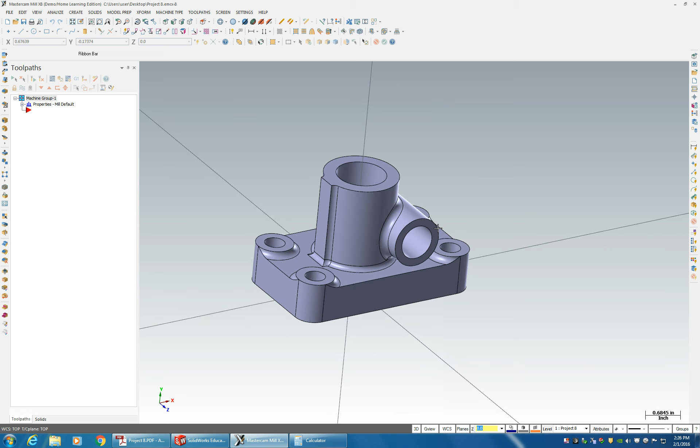I'm going to rotate this thing and move it, because right now I'm on top WCS, and when I click top I'm actually looking at what I think is the front face. So let's 3D translate this: select this guy, and we'll take what is currently the top view and make it the front view, moving only—make sure you don't have copy checked. Approve that and it rotates 90 degrees for you. Now when I click top, we're looking at the top of the part. It just helps with orientation.

Next we need to import our casting, which we'll use to drive our stock. So let's go File, File Merge Pattern, navigate to your desktop again, select SolidWorks files, and we'll do Project 8 casting.

It imported fine, but it's in the wrong location too. I'm going to clean some of this up—come to levels, we'll call level 1 CAD. Don't know if we'll actually use any CAD in this project, but I have to keep it consistent. Number 2 will say solid, and number 3 will say stock.

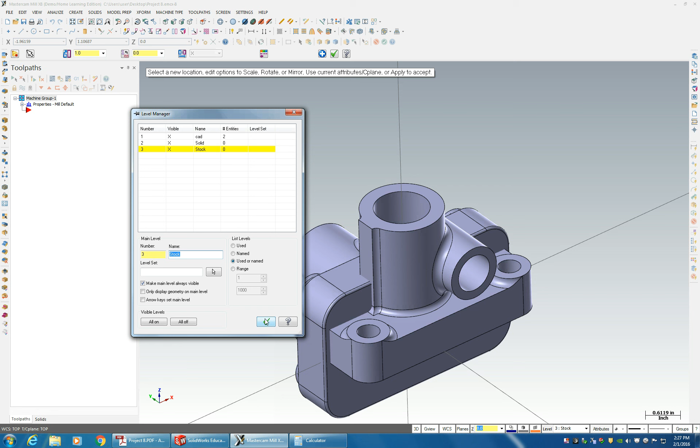We need to move our finished model to solid and the casting to stock. So clicking this guy here, right click on level, move him to level 2. I can turn the visibility of level 2 off. Now I can click this guy and move him to level 3.

Now he is also oriented wrong, so we're going to rotate him too—X form, translate 3D, this guy here. We want the top view to become the front view, and we're only moving it. Clear the colors. So now when I turn on the second one, you barely see anything.

That's fine. Next we need to set up our machine type. Let's go to mill, and we'll choose a generic Haas 3X mill. If you don't see it here, click Manage List, and it'll be in the left hand column. I already have it set up, so you click here and get this in your toolpath manager. Let's open this up, go into Files, Tool Settings, and click these first 4.

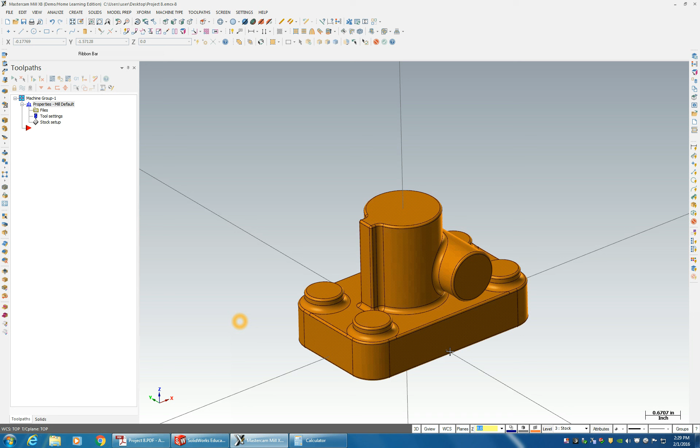For stock setup, we're going to do solid. We'll click on this arrow here, select the solid we call our casting. We want to display it, want it to show up as a solid, and we'll approve it. Now we'll come back, activate layer 3, turn on the visibility of layer 2, turn off the visibility of layer 3, and there we go—we now have our finished part nestled nicely within our casting.

You may see this area here, which is just the way the fillets were created between the two models in SolidWorks. It's nothing we really have to worry about. In reality, the castings would vary from part to part anyways.

Now that we got this all situated, let's get started. I'd say the first operation I want to start with is putting the part in the machine like this. It'd be sitting on a fixture, held somehow—we're not really worried about fixture design right now.

I'm just going to set my WCS to the center of this bore. It may not be the most appropriate one in reality, but for the purpose of education we're going to set the origin right at the center of this, at the finished height of this machine. So let's go to WCS, Plane Manager.

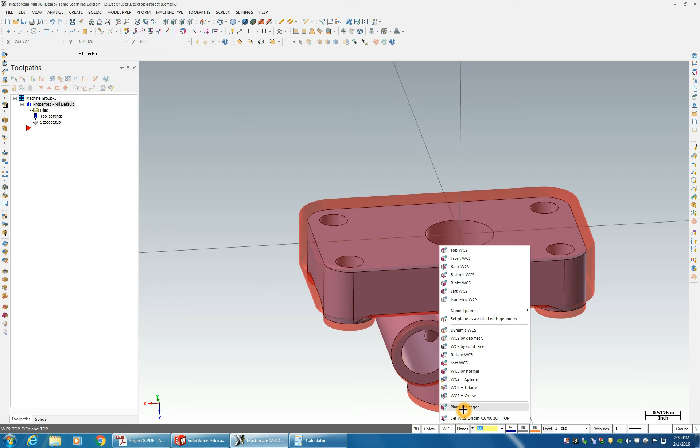We're going to click Solid Face, and we're going to click this here. And we're going to navigate through our options until we get the one we like, where the X is going to the right, Y is going to the back, and Z is going up. Now, it's not in the best spot, but that's okay, I can fix that. I'm going to call this bottom ops.

Right here, the select new origin, I'm going to click it, and I'm going to highlight the edge of the circle until it snaps to the center. And that's what I'm looking for. So there's our bottom ops.

So now what we need to do, we're still on WCS top, TC plane top. Come over to WCS, click named planes, bottom ops, planes, named planes, bottom ops. So now we got bottom ops and bottom ops. So every time we do a cutting operation, it'll use those to drive it.

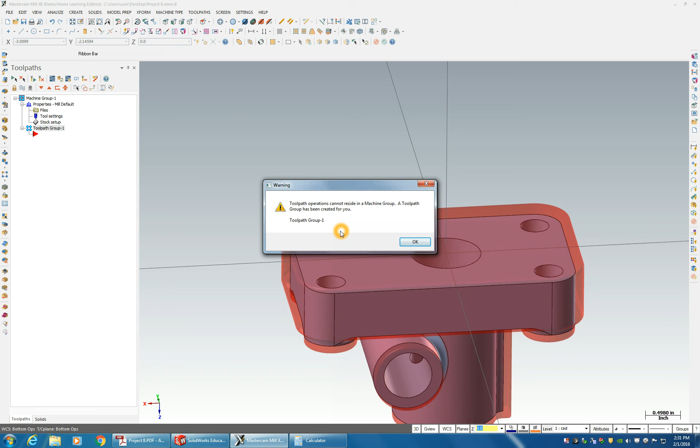So let's go ahead and start a facing operation. We're going to face this thing. And ignore that warning that came up, it was just, I must have clicked on something. So this will come up.

Now if you're using X9, you'll have a couple more options here. The only two I wanted, these two right here, loop, because we're actually going to use loop. I'll select that, make sure it's doing this loop, not that loop, and all that does is it just toggles between those two faces. So that's the face I want.

We'll approve that. Come to tool, come to tool type now, we're going to be doing a facing operation. Come to tool, and I'm going to create a new tool. I'm going to create a face mill.

Go to next. Let's use a 2.5 inch face mill. Secondary diameter is 2.75. Overall length is 2. That's fine. Cutting length is 0.25. Let's do 0.375. And it doesn't.

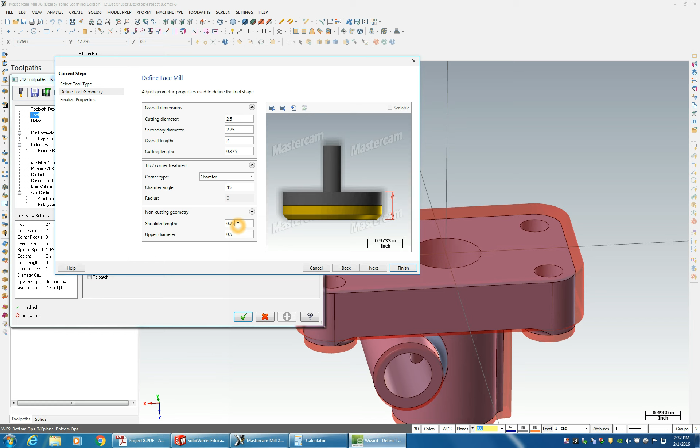This information would make more sense if you actually had your tool with you. Chamfer angle is 45 degrees, shoulder length 2, and upper diameter, that means we have to do overall length of 3, and upper diameter of, say, 1. That looks kind of more like a shell mill.

So let's go to next, and we'll look at tool number 1, feed rate. Now, in your X9 you'll have a bunch of more information than I will here. Just ask your instructor on how to use that if you need to know how to use it. But for me, we're going to do 1500 RPMs on this.

Now, we have 6 teeth in this cutter, so 1500 times 6 times 0.002 chip load leaves 18 inches a minute. Plunge rate, I kind of like to use 20, because I don't plunge a shell mill, 20 is just kind of a little faster movement. It's 6 teeth, it moves clockwise, it's carbide tipped, and I'm going to turn on the coolant.

Come over here, we'll call this 2.5 inch face mill. For face mills, I kind of leave, I'll do 45 and 5 for both rough and finish. So we'll finish that up.

Now the benefit of creating a tool here in your list is all this information is set for you. You don't have to change it every single time. If you pull from a library, oftentimes this information is going to be set to what the library has it, and it may not be what you want, and you're constantly finding yourself changing it.

So let's go over to cut parameters. Looking at zigzag, across overlap 45%. Along overlap 110 looks fine. Approach distance 50, exit distance 50. Maximum step over 45%. We zero this out because we want it to cut all the way to the surface.

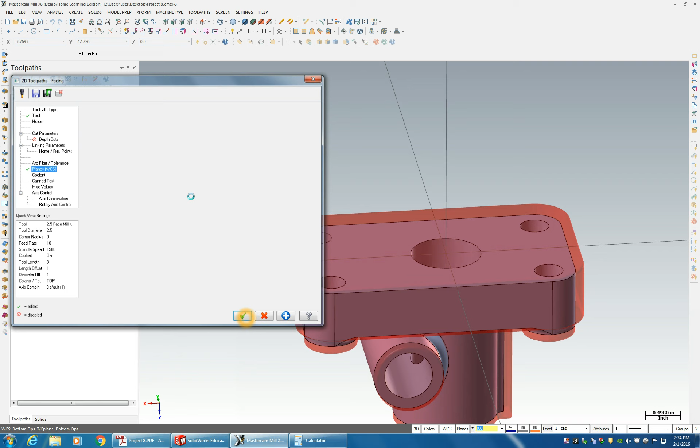So, okay, let's go into our planes, make sure this says bottom ops, this will say top top and grayed out, that is correct, with a work offset of 0. So we'll approve that. As you see, we have a nice cross entry and an exit of 110%. So we can quickly go take a look, see what we see if we like what we've done.

And there we go. We have a nice flat bottom, which is what we needed for our drawing. So we'll close that out and come back to our part.

Okay, so we're back in here, and now we're going to profile this guy. So let's go to mill tool path. We are going to do a contour. We'll leave this loop count, and we're going to select this loop, and that's the correct loop we're looking for.

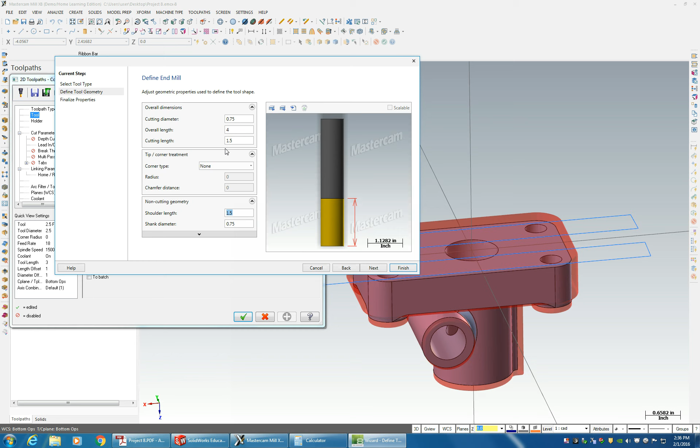End mill, we'll do a 0.75. Overall length of 4 is fine. Cutting length, we'll need a little bit more, let's go 1.5 on the cutting length. There's no corner type, shoulder at 1.5. Shank diameter of 0.75, that looks good.

So let's go to next, leave the tool number 2. Now feed rate, I said 80 is our surface feet per minute, I believe I had mentioned that. If not, we are machining cast iron, and we're going to use 80 for if it were with high-speed steel, but this is carbide, so we're going to multiply it by 3.

So we have an SFM of 240 times 4 divided by the diameter of the cutter. We have an RPM of 1280. Let's multiply that by the number of teeth, which we have 4, times 0.004, we'll use 4 thousandths for a 3/4 inch cutter. Feed rate of 20.48.

Now in reality, what you'd be doing is you'd be contacting your tool manufacturer, looking up their catalog. Oftentimes these cutters can actually achieve a lot higher surface rate. I've seen carbide and steel doing 800, 850 SFM. But for purposes of this, we're just going to go ahead and stick to the 2 to 3 times rule of HSS, more likely the 3 times.

So let's go ahead and look at the plunge rate. Once again, we're not actually going to be plunging this cutter, so let's take it at 25. Retract rate of 50. 1280 is RPM clockwise, and we have 4 tooth. It's carbide, and we're going to say this one does not like coolant, so we're going to leave it off.

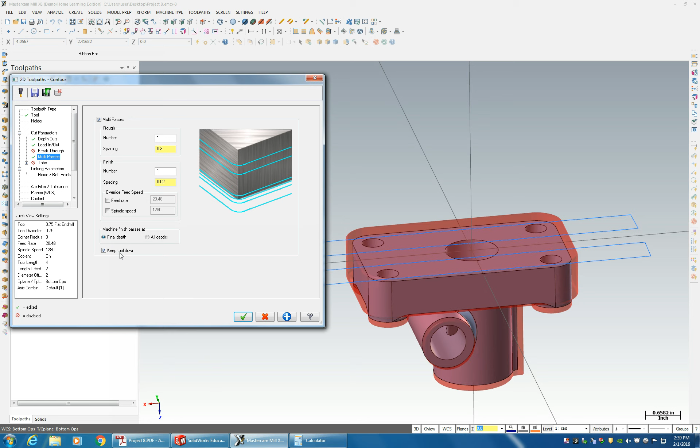And we'll go ahead and use the default feed rates. We'll machine at final depth, and we'll also keep the tool down. So for linking parameters, the only thing we should have to change here is the top of stock is still okay. Actually, top of stock is now 0 because we faced it. We'll leave the feed planes there.

And depth, we're going to actually click on it right there. That was the top of this pad. And we'll give it a little bit more depth of cut. Let's go 1 point, we'll go all the way down to 1 inch.

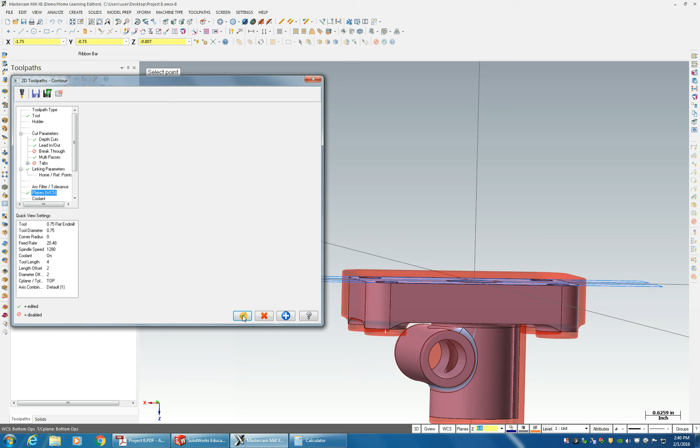Planes, we'll leave this at bottom of ops, top and top, and we'll approve it. As you can see, it kind of went around and does this nice finish pass for us. So let's take a look at what we got so far.

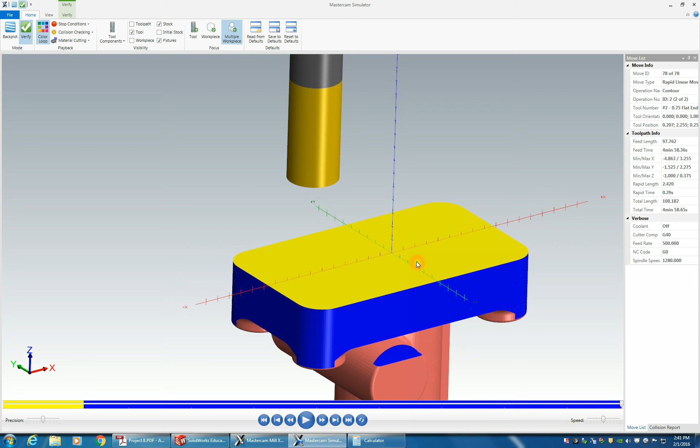I always like to have my colors turned on so I know what's doing what. So it comes across and profiles our part. Now you notice it's also hitting here. That's okay, I'm not too worried about that because that isn't going to end up being machined to the exact same width, but we'll do that one from the top. Looking pretty good so far. If you're worried about this one, we can always reduce it, but I'm not worried about it for this one. So next, let's go through and center drill our holes.

So, mill toolpath, drill. We'll pick the center of all 5 of these points. And the order you pick them is the order they drill. See, I got that in the wrong spot. So, edit. Okay, well, let's see, I'm going to reselect those.

Mill toolpath, drill, and reselect these center points. I didn't wait for the arc center to take that one, so we're good now. Now tool here, I'm not going to create a new one, I'll just select from library tool. Let's change our filters so that we only have our center drill. I'll take a number 3 center drill.

Speed, feed per tooth, plunge, that all sounds pretty good for me. I'm not going to worry too much about it. You actually probably want this thing spinning faster, and you want to make sure coolant is on when you get to it.

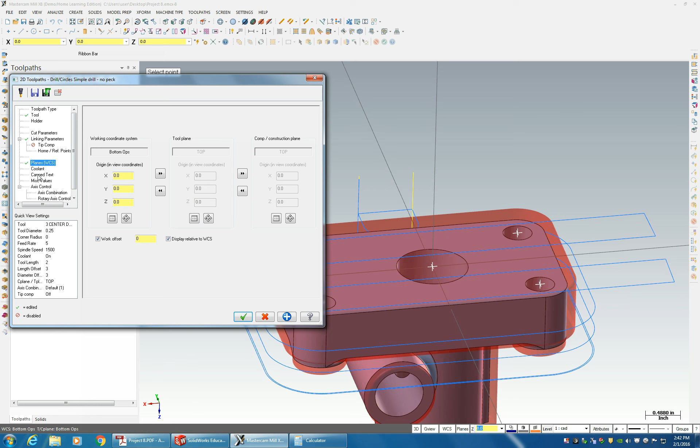So cut parameters, we're going to just do a drill counterbore. Linking parameters, negative 0.05. Top of stock is at 0, and retract is 0.1. We don't need a tip comp. Planes WCS is fine, and coolant is on. So it'll come through and spot drill these for us now.

Next is these holes. Looking at our print, the diameter of the hole is 0.41. Now I quickly went to the internet and pulled up a drill chart here. This may be real hard to read because it's grainy on my end, it's going to be even more grainy. The 0.413 I'm showing as a letter Z. It's 0.413, it's 3 thousandths bigger. A lot of these drills are a couple thousandths undersized anyways, so we're going to go ahead and run a Z drill on these particular holes.

So let's come up, mill toolpath, we'll drill. Actually, we don't even need to do that. What we're going to do is take this toolpath here, copy it, and then paste it. Now, be careful when you copy paste because it'll copy everything that has a green check mark on it. I only had that one check marked when I hit copy, so it only produced one instance of it. We're going to come back into parameters, and I'm going to change my tool.

So we're going to select from library tool, and filter out for drill bits this time. That's this icon, not the center drill. Your filter icons may be a little different in Mastercam X9 or later. So I'm going to zoom through here till I find a letter drill. Letter F, letter Y, letter Z right here.

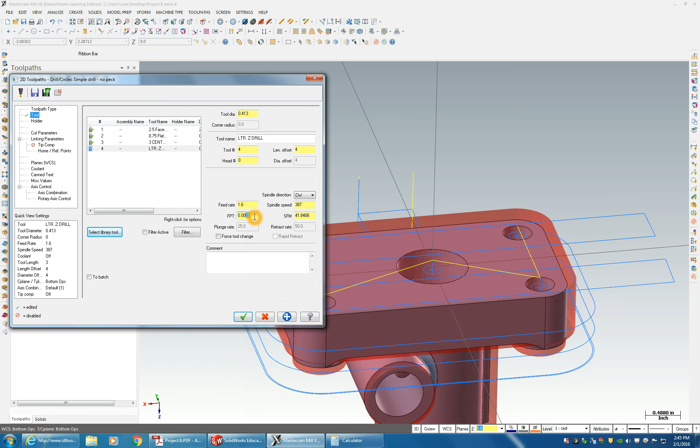So we'll go ahead and approve that. Well, we got a couple other things we got to do. Cut parameter, we're going to do a chip break. We're not going to pull the tool back out, we're just going to break the chip as we're going down. The peck is, we'll use 0.413 divided by 2. I like to use half the drill.

Linking parameters, top of stock is 0, retract is 100 thousandths. Depth, we are actually going to the bottom of these holes. We're going to do a tip comp, so we want to bust through those holes. We want to come out 125 thousandths because remember this casting's still got the pad on it. So we're going to come out, break through 125 and add this tip on. Planes, bottom of ops, coolant is on, and we're going to approve that.

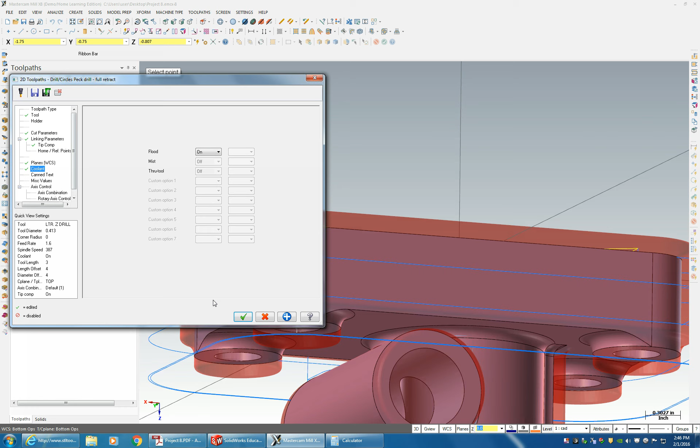But we got to make some changes here. Regenerate toolpath because I don't want to drill the center hole. So let's come into geometry and find the point. We want point, I believe this is point 3. Yeah, see the little cursor shows up here? I'm going to just delete it. So delete that point. Oh, that didn't work, so I'm going to try it again. It's under geometry, just highlight point 3 and delete. There. Regenerate. And you see it only does those 4.

Let's look at our simulation again and see what we get.

Okay, so only spot drills left here. Next we're going to go ahead and drill this one out.

Actually, let's go back and add this in here because we're going to use a clearance hole for it to mill, leaving about 20 to 10 thousandths on the wall, and then we'll bore it. Let's make that correction and add that point back in. Click on geometry, click add points, and add that one.

Regenerate. The order's a little weird, so let's come back and click sort options. Okay, so that's that sort option. Don't really care for that one, so let's sort again. Same style, but let's go this direction here. That's a little bit more efficient. Looks better.

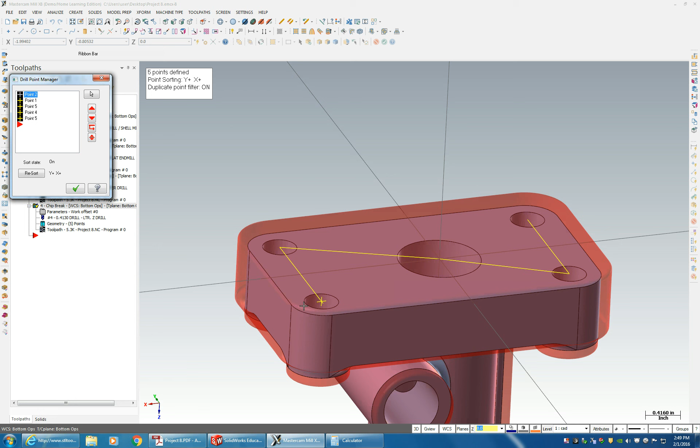In fact, we'll come back to this geometry and resort this one too. Okay, that looks better. So now we'll have our hole.

Ooh, you know what, we can't do that because we need that hole to come all the way through for that mill. Shoot, okay, let's go back and delete it back out.

So we'll highlight Point 5 and hit delete on your keyboard. That's all you need to do.

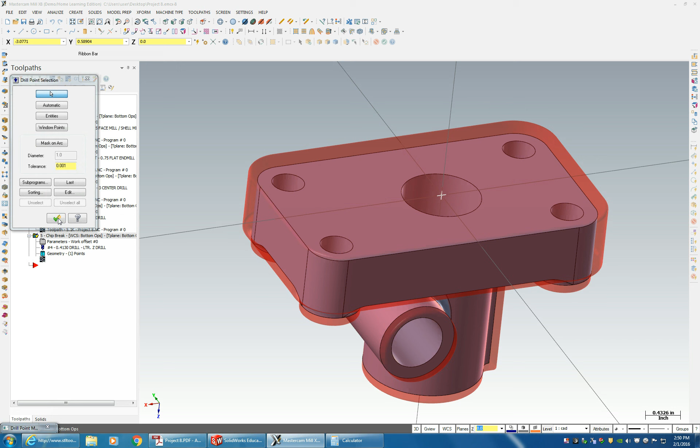Now we'll take this one again, we'll copy it. Where's copy? Oh, I'm losing my mind. There it is, copy. Paste, same thing, except we're going to go through and change our geometry. We're going to reselect all, this time just selecting the center one. Approve that, go to parameters, and we just got to change our linking parameters to the depth all the way down here. We'll approve that.

Regenerate toolpath, now let's see what we got. That hole should go all the way through. Now I don't know if you noticed that, but that drill bit bottomed out. So in reality, you have to be real careful that you don't smack your tool holder right into your part. Your bit needs to be long enough to actually get all the way through it.

Okay, well we're looking good now. Let's go ahead and think, in reality, would we be able to bore that all the way out, or be able to drill or pocket that all the way out? Probably not. So we're going to go ahead and pocket this, just from the bottom operations, get halfway through it, and then when we flip it over to the other side, go halfway through again, and then bore it from the other side.

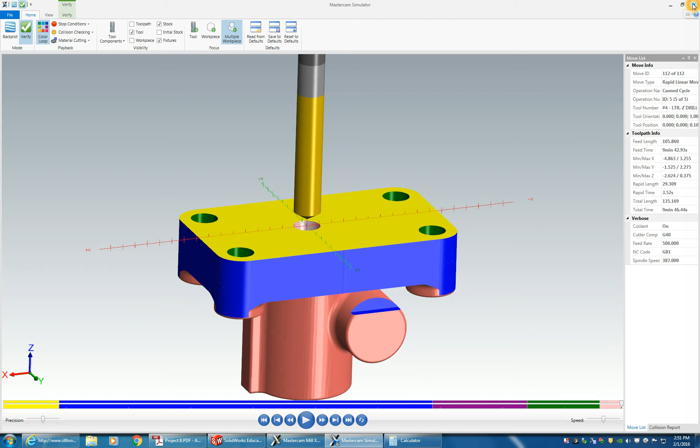Okay, so let's pull up a mill toolpath, we're going to pocket. While we're in solid select, I'm going to chain that edge. It's hard to tell which surface we have, we won't know until we develop our tool.

In our tools, we don't have the right tool, so we can use that 3/4 inch. Let me see what our size is here.

Okay, so looking at this now, maybe that hole in the middle wasn't the right size. We probably should have bumped up to a 3/4. Let's go fix that real quick, because this hole here is an inch. We're going to use a 3/4 to basically clear it out. So let's close this down.

Come back up to here. We're going to open up a new tool, or just select from the library. Looking for the 3/4 inch. There it is, 3/4 inch drill. Got to check our feeds and speeds.

So 4 times 80 divided by 0.75, divided by 2. Sorry, okay let's try that again. 4 times 80 divided by 0.75 divided by 2. 213 RPMs. And we're going to do probably 7 thousandths chip load per revolution. So 0.007, feed rate still 1.5. So 1.5 here, 213 RPMs.

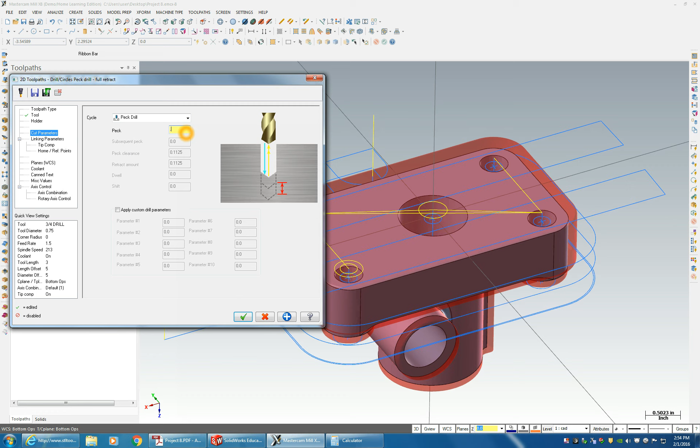Looks okay. Cut parameters, everything should be fine, except we want to change our depth to 0.375. We could probably do more than that with this, probably 0.75, we can go the full diameter before we pocket. Coolant, we still want our coolant on. We'll approve that and regenerate.

So now when we go looking at this, we have an appropriate clearance hole for a 3/4 inch end mill that we'll use to pocket this thing out. It probably would have been best if we did these holes first for sake of order, because we were putting the 3/4 inch away and then pulling it back out to use it again. So we may reorder these tool groups when we're done with this bottom operation, just to make things more efficient. Let's go ahead and pocket out this hole, leaving 10 thousandths on the wall.

So now we'll come up mill toolpath, pocket, and select that. It's hard to tell which face is right.

So tool is this 3/4 inch end mill, leaving all our information here. We're good on that. Cut parameters are standard. We want 0 on the floor, and let's do 10 thou on the wall.

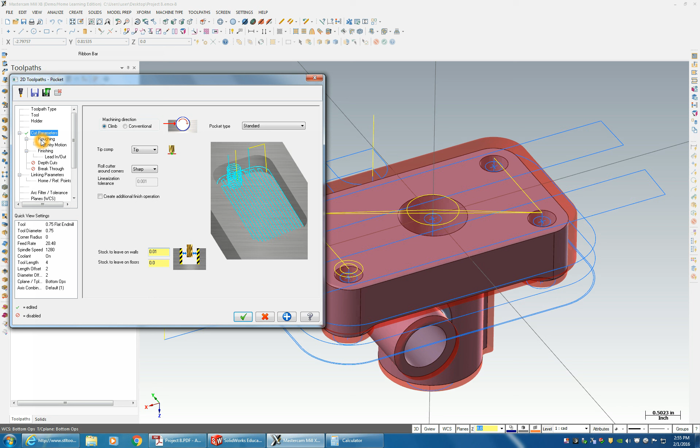Our roughing entry will have off on the entry motion, because we're going to use that clearance hole we just created. Roughing will do true spiral. We're not going to do any finishing, so I'm going to turn that off. We are going to do depth of cuts at 0.375. We're not going to worry about breakthrough, because we're not going to get all the way through this guy.

So linking parameters, we're going to do depth of here. We're going to divide that by 2, because we're only going to go halfway. And I'm going to increase it just a little bit so we have a little bit of overlap. So 1.2. Top of stock is actually at 0. Feed plane there is good.

Planes, bottom operation, coolant off, because this cutter likes to cut dry. But you know what? It would help to actually, we're going to turn coolant on in this case, because we need to try to get the chips out of this pocket while it's making. You don't want to double cut chips. So if we had maybe blast air, it'd be more efficient.

Depends on the cutter. So as you see, it's gone down and it's created our holes. Once again, let's review. See what we get.

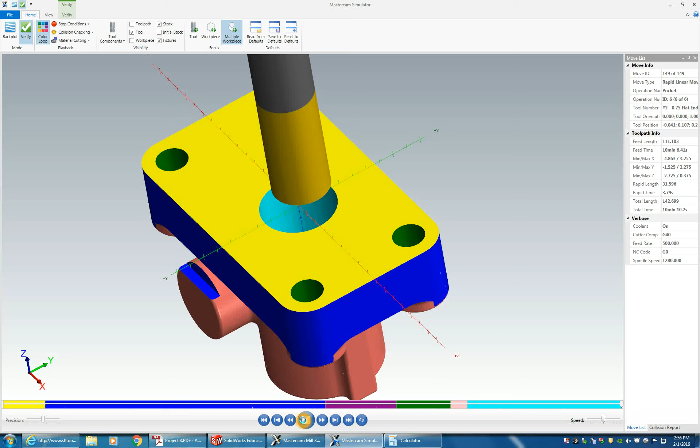Shell, profile, center drill, drill again, and pocket that out. Now I'm going to go through and we're going to reorder these guys to where it makes more sense, because I use this 3/4 inch cutter to cut this profile, and then I pull it back out to do this bore. So we did an unnecessary tool change.

So looking at this, facing is a very good one to do. We're going to take the peck drill, this one with the center drill, and we're going to take it, close it down, and we're going to drop it right there. So now it's second operation.

Next will be the drill with, let's see, we'll do this, we can do the Z drill next, which is fine, followed by the 3/4 inch, and then a contour and pocket. That is probably much more efficient.

So this is all the bottom operations. And to verify that we do have our operation in order, we can go ahead and resimulate. So center drill, profile, profile, profile, profile, and then pocket out without a tool change. There we go. We now basically have the bottom done.

So let's go ahead and hide all these tool paths. We don't need them. Next operation is we're going to work on the top.

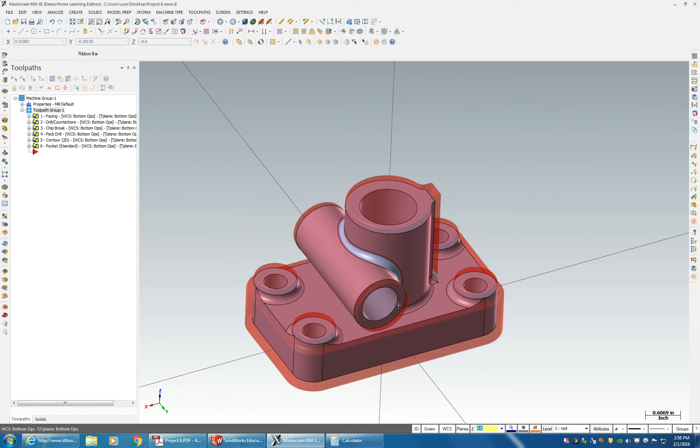And what we got to do on the top is we got to surface this guy, these pads here, finish trimming these to their, we're actually going to leave these alone. We're going to do them on their edge. Well, do we want to do that? No, we'll go ahead and profile them off. No big deal. That way we don't have to do two sides.

If I machined it up on its edge and I profiled or machined this one and then drilled through here, I would still have to flip it over to the other side to get this pad off. But if I go ahead and do it from the top, we can profile this off in one pass and I only have to do one side operation versus two. So save some time.

Okay, so let's go ahead, bust out our 3/4 inch end mill. We'll leave it in. We're going to create a new tool path group.

Do you really need to do it? Nah, not really.

There, that puts it down. I'm trying to reorder these guys here.

Okay, so we'll call this toolpath group bottom op. We'll call this toolpath group top op.

And bring our red icon below it. So we got to create a new WCS. I'm going to once again use the center of this bore for that purpose. Plane manager, solid face, select this guy. I'm going to have it kind of sitting in my machine like this, so we'll go through our options until I get this. Looks pretty good. Give it a unique work offset. Call it top op.

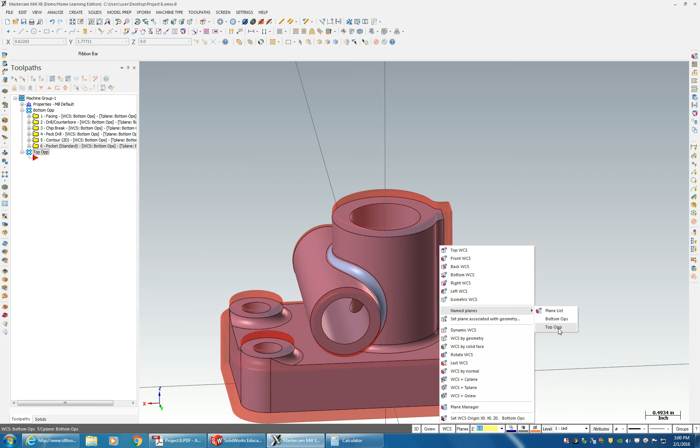I'm going to select the center of that circle and I'll prove that. Now in WCS's, name planes top op, planes, name planes, top op. And there you see our new orientation right there.

So let's go ahead, and with our 3/4 inch end mill still installed, we're going to do a face, multiple faces at one time. So let's select, other face, that face, that face. I'm going to see if this works. I haven't done this before, but I think it will. That face, that face, and it may not. I may see this as island pocketing. And that face.

Okay, tool, 3/4 inch flat. All of our variables are still set since we created that tool. Cut parameter, zigzag is fine. Leaving all the parameters we have. Depth of cuts 0. Linking parameters, leave this as incremental. So leave that at 0. Top of stock is 125 thousandths now, above 0. So feed plane, these are all good. Top op, top, that's good. Coolant off. Let's see if it works.

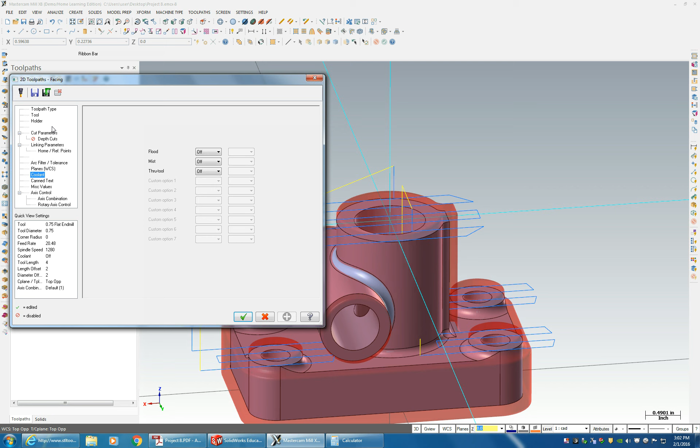Cross your fingers. Hey, look at that. Now it does cause us a little bit of problem. The orientation is bad. So let's go ahead and open up our parameters. Cut parameters, rotate things 90 degrees. Improve that, and let's see if we get a better result.

Now the question becomes, do I miss the wall here and here? My gut says I don't. Let's take a look. Bam. See, I hit that. Okay.

So let's go to geometry here, open up these solid chains, and delete that loop, that loop, that loop, and that loop, leaving only the top loop. Regenerate. That looks good.

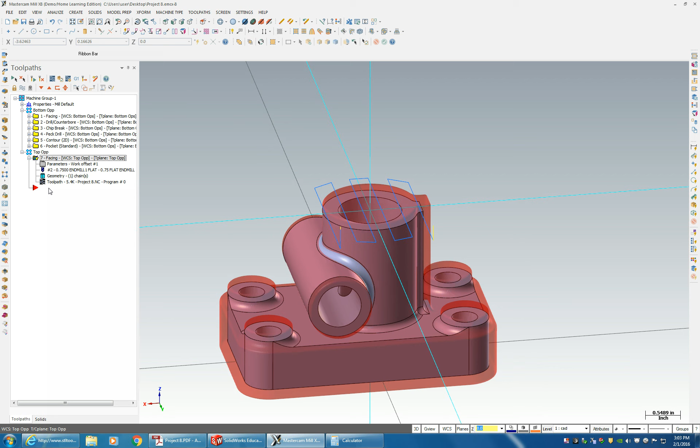So let's see. Let's check mark that one. We're going to copy it and paste it here. For geometry, we are going to rechain all. Other face. We're going to do that one, that one, that one, and that one.

Come to parameters. I'm going to try to see if we can get away with one way. Actually, one pass. See if it'll do it. Let's prove that. Regenerate toolpath. Nope, tool diameter is not good enough.

So let's come back to parameters. Let's go zigzag. Prove that. And we're still going to hit. So let's see if we can adjust the parameters to where we don't have enough overlap here.

Okay, well, this facing operation just really isn't working very well. So we're going to get rid of that. I'm going to go ahead and do a pocketing. So let's make sure you only have that one green check mark and hit delete. If you have multiple check marks, it'll delete everything check marked. So mill toolpath, pocket, and we're going to go through and select these spots.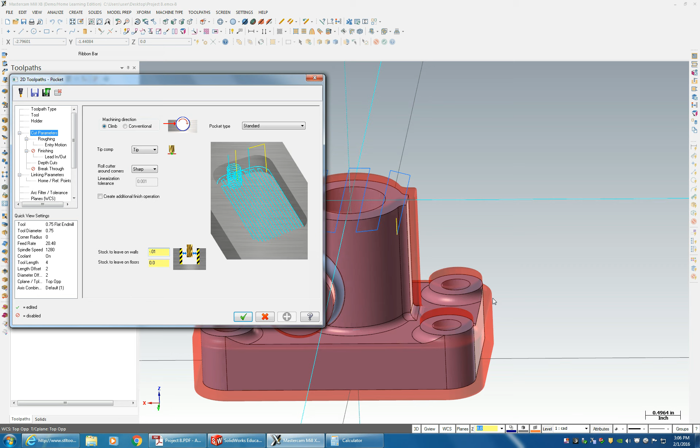Tool, 3/4 inch end mill, cut parameters, stock to leave on the walls. I'm actually going to do something a little different. I'm going to negative 0.01. So what that's going to do is going to go beyond the wall 10 thousandths of an inch, making sure we get a bite of everything. Maybe let's increase it to 20 thousandths.

So roughing, I'm going to go true spiral, entry motion. We'll go ahead and do a helix. It's really not necessary because we're going to leave it off because we have a clearance hole. We're not center cutting. Finish.

Let's do. So do we want to do any finishing? No. Let's not do any finishing. Depth of cuts. No, we don't want depth of cut because we're going to be able to do this all in one shot. Linking parameters.

Top of stock is actually here plus 125 thousandths. The feed plane is going to be this number here, add another 100 thousandths to it. Retract is an absolute. And we're going to come up 0.2 on that one. The depth is also absolute. We want to come down to that ring.

So there's our values that we need in order to control this tool. Leave your planes at top. Now if you have this wrong, this retract wrong, when it pulls up to go over to the next pad, it'll likely run across things. So let's go ahead and take a look and see what we got.

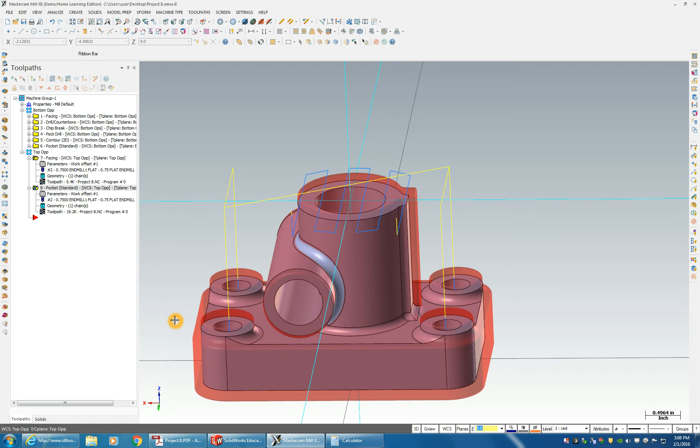We want feed plane to be there. We want the feed plane to be absolute too. So everything's absolute. Okay, so let's take a look and see what we get. So there's a little circle at the bottom. Turn on all our machine groups, see if we're getting, make sure we're not missing anything.

Okay, so I actually did something wrong. I went too deep. I actually need to be on top of these fillets. Let's go redo that.

Under parameters, top of stock is going to be here plus 0.125. Feed plane is going to be this value here plus 0.1, and depth is going to be there. So that should be better.

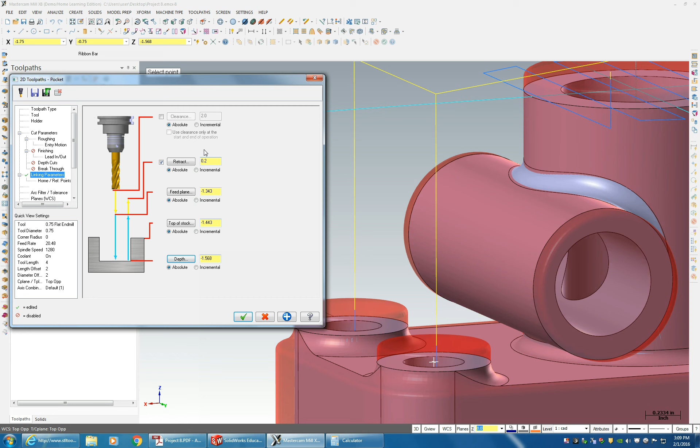Let's go ahead and regenerate that toolpath. Yeah, see the circles now are right at the top of this bed. Let's highlight everything and go ahead and simulate again. We didn't — for some reason, that path did not get selected. Okay, that's much better.

Next operation, we're going to just go ahead and keep going along with this 3/4 inch. We're going to go ahead and profile mill these guys off and also deal with that hole.

So how are we going to do this? Let's project this circle to a flat plane. We're going to make sure we're on level 1. I'll turn off all these tool paths. And we're going to do X-form project.

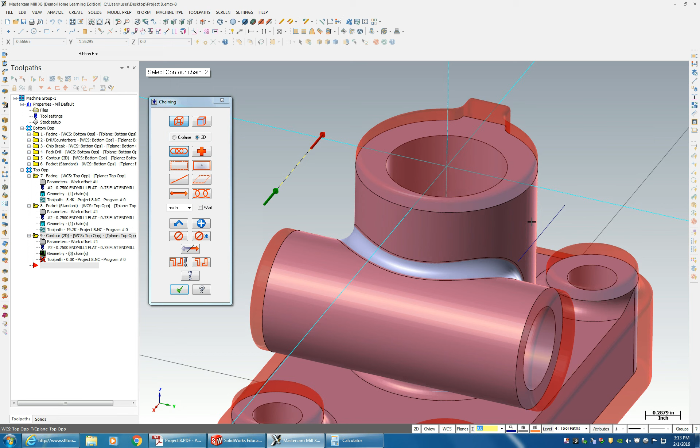So mill tool path, contour, we want that chain — that's the right direction — and this chain, and that's the right direction. Tool, 3/4 inch. Cut parameters, we're going to leave it 2D, everything's at 0.

Depth of cuts, we're going to do it in one hit. At least, we'll probably do it in 2 passes. Don't need to lead in, lead out. We'll turn off entry and exit, and

this will just contour. Now, in my last video, I had a hard time with this stuff. It's because I was backwards. I thought the second column was percentage and the first column was length. They're backwards — first column is percentage, second column is length. So we just need to extend past our lines 50% of the cutter and make sure they are being extended.

We will want to do a multipass. I'll have one rough and one finish. Linking parameters — top of stock this time is going to be about right there.

We're going to copy that over to here, add 100 thousandths to it. We're going to retract absolute. This is absolute, and depth is also absolute. We're going to just add a little bit more to it so that we know that it's clearing. So that looks all about right.

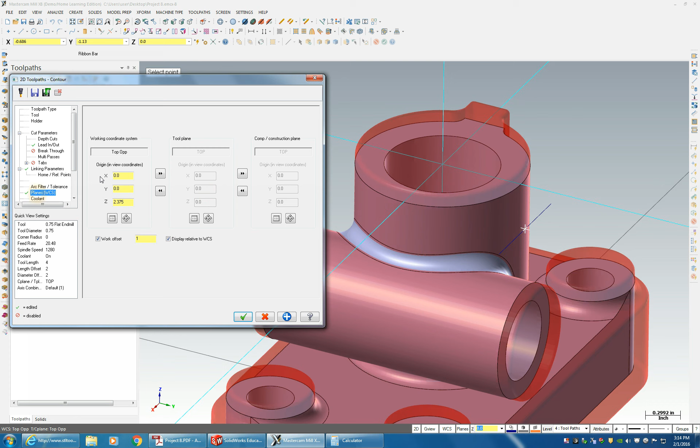Planes, Top Opp. Going to prove it. And see, as it comes through, it's making all these nice cuts. Comes up, clears over, and does the other side. So as usual, let's go ahead and see what we got.

Looking pretty good. Now it looks like we have an issue here. That's not really an issue — that's just this cut, remember, is reaching down. So let's go ahead and move on to the center bore.

Now instead of — let's go through here. We're going to copy this guy here. Remember, that's the tool path we used on the bottom. So we're just going to use the same one on the top and just change some parameters.

So parameters, first we need to do is our WCSs. From Bottom Opp, we want Top Opp. So it's looking at a different location from up here.

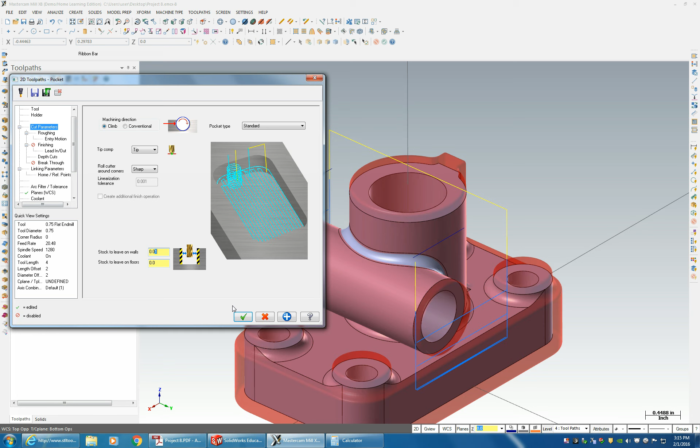Still use the same roughing, entry motion. We don't want any finishing. We do want depths of cut. We also want 10 thousandths left on the wall, so everything looks pretty good. Our linking parameters should also be enough to meet us halfway through. So we'll regenerate that tool.

Let's make sure it's running the right way. Let's go ahead and just simulate that one because I want to make sure I got it running the right way. It's not coming from the bottom. It shouldn't be. Well, looks like it is. Shoot.

Let's go into parameters again. Planes, Top Opp, and we need to push that over. That's what happened. And also, while we're at it, redo our chain to the top.

Yeah, that should look better. Let's go ahead and look at it. Make sure it's coming in from the right direction. Yes, it is. So there it is.

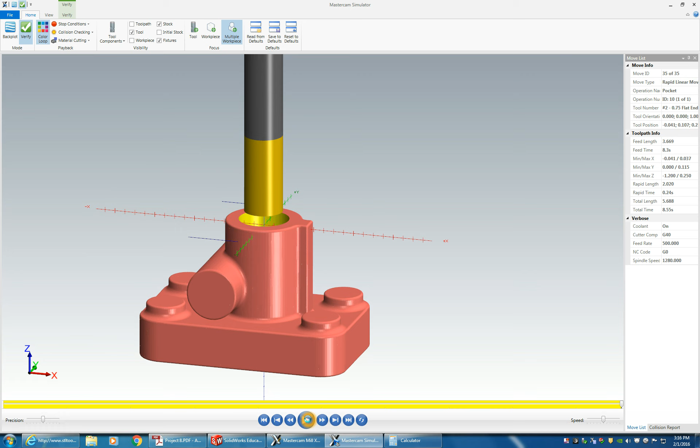We need to simulate everything to make sure we are going all the way through the part now. I missed some operations.

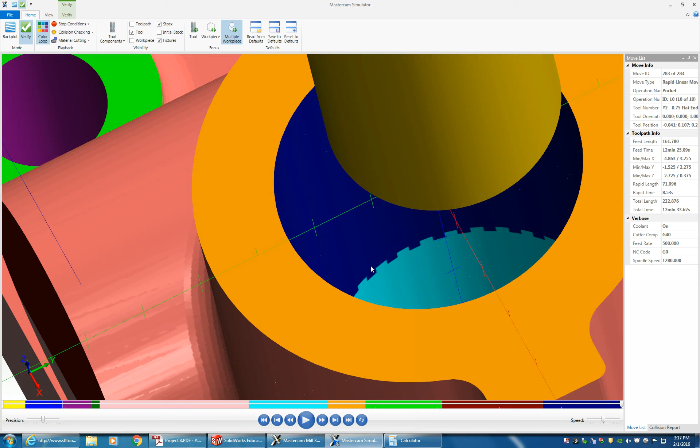Okay, so I want to make sure we look down in here and we're seeing this little checkered step pattern. That means we're overlapping on our cuts, which is good.

Okay, so we need to now bore out the center of that hole. The diameter of that hole, we're going to have to create this one, is 1.00 to 1.02. Let's go ahead and make a boring head at 1 inch.

Mill tool path, this is using a drill when we're boring. Select the center of the hole. Prove that, and we are going to be doing drill. We're going to be doing drill. I know it doesn't make sense right now, but trust me, that's what we're doing.

So let's create a new tool. We're going to be doing a boring bar. Cutting diameter is 1 inch. Overall length we want 6, so we want to make sure we're clearing it. Cutting length is fine. Tapered angle is fine. Corners none. Shank diameter we're gonna go 0.75.

Shoulder length. Yeah, it looks kind of weird, but that's okay.

Feed rate, probably want a 2 thousandths per revolution feed rate. So sticking with thousandths, 1,000 RPMs. 2 inches per minute is our plunge rate. Worried about our feed. Retract rate is also going to be at 2 inches a minute because it's going to be a bore in, bore out, and we want no coolant on this.

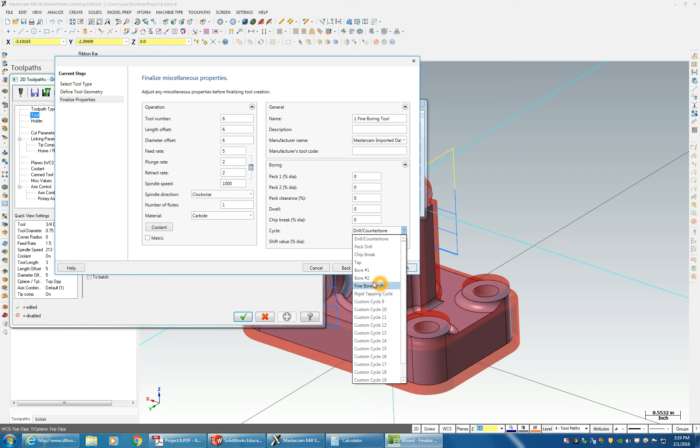Oh, we want to set this right here to boring number 1. So what happens now when I come to cut parameters, this bore number 1 is automatically set. We don't need a dwell because we're not going to be bottom boring.

Linking parameters, top of stock. Top of stock is actually at 0. The depth, we're going all the way down to here. I'm going to increase the depth by just a little bit so we get through it. Make sure this top op, and that should be it. Now that's a drilling operation getting all the way through.

And as usual, now this is our last operation on the top. We're going to go ahead and see where we're at in the simulation.

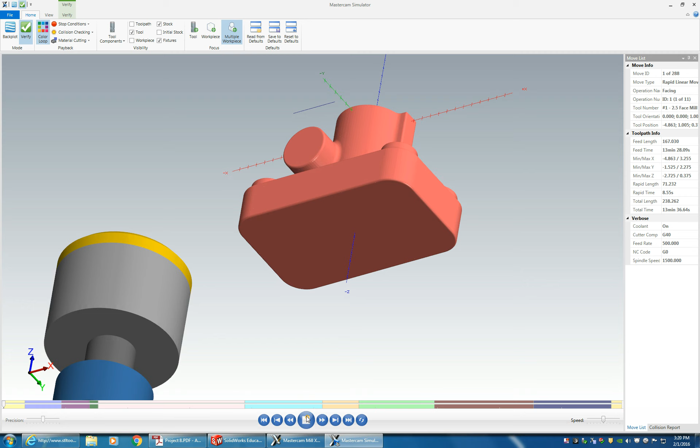Bottom. Going through from the bottom. Small drill. And there we go. Nice boring operation all the way through.

So all we have left to do now is some side operations. Now for the side operations we got to go drill and bore this guy out, and then also run a small tool up there. And you know what? It's going to be impossible.

We're going to try to machine this as best we can. We may come in, I think we'll come in from the end. We'll have to add another operation. So that's fine. So this fillet is actually going to disappear.

Remember how I said, well, you know what? We can actually achieve that with a ball mill. We're going to come in and we'll machine up to here, and then we'll come in with a ball mill and machine that fillet in.

So let's take and we'll place this guy on its side now. Groups. Toolpath group. Side op.

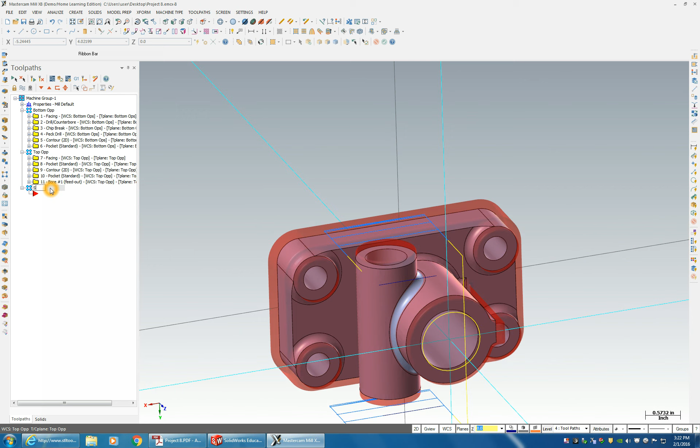We're going to do a new origin. I'm going to put in the center of this bore. So let's go to WCS, Plane Manager, Solid Face. Selecting that, going to toggle through until I get the one I like. I like this one. Just to make sure, I'm going to reset the origin to the center of that bore.

It didn't move, so we're good. Give it a new offset.

Yeah, we'll go ahead and leave it at 0. We're going to assume this is a different orientation. I'm not worried about offsets in this.

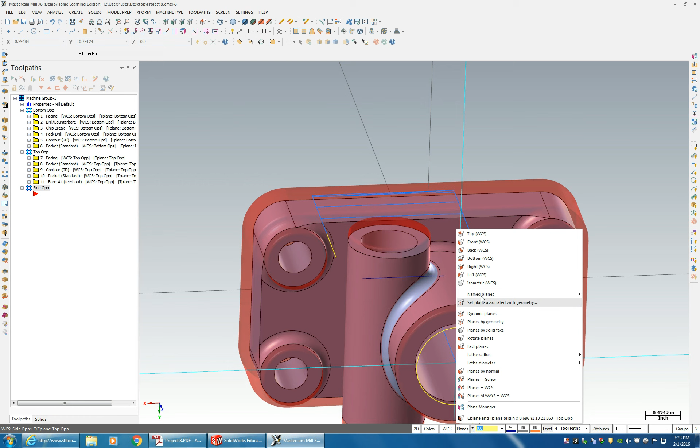Prove that. So WCS, named planes, side op, planes, named planes, side op. I should say right here now.

First things first, we'll take and do a peck drill. I'm going to highlight this guy here, copy him, paste him down here, open up parameters, change our planes to side ops and push it through here. Leave this at -0.05 still, and we're going to have to reselect our geometry.

Center that. Let's go ahead and regenerate and see if it did it right or not. Doesn't look like it.

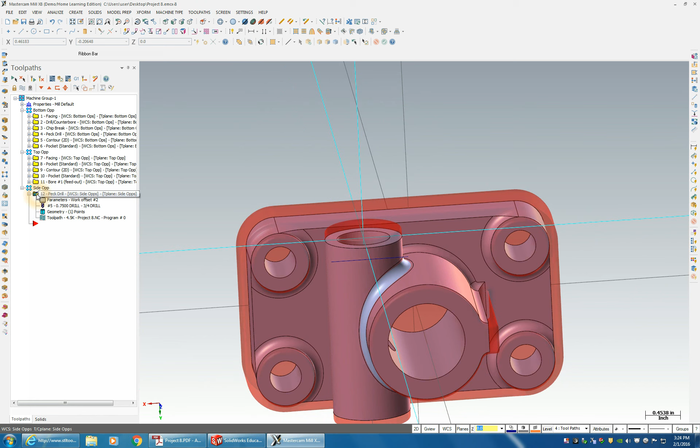Parameters. Plane side op, we're good there. Linking parameters, top of stock, it's here. Depth, 50 thousandths. Prove that and let's simulate it, see if it simulates correctly. Or not. It looks like it's doing it.

Oof, what kind of cutter is that? Impressive. Ah, we have this drill selected. That's what it is. Should be the number 3 drill.

Take a look at those feeds and speeds. 1500, feed rate of 5. That should be better. Okay, simulate the whole thing.

We'll set to absolute, try that. I just want to simulate just that one. Oh, you know, it's going to look like it's drilling real deep because I haven't machined that off. So it's going to look good.

Okay, so now we need to bring up that 3/4 inch drill that we had used before. Wait, let's see what size of hole that is first. It is 0.688. Let's pull up that Z drill, and we'll go with the Z drill. So we're looking at the peck drill here, we had 3/4 here. Center drill, chip break, there it is.

So we'll use this guy, we'll copy it. No, let's not copy it, let's just create anything new. No big deal.

This one's pretty easy. Mill toolpath, drill. Just center of that. Tool is our letter Z. Everything's already set. Cut parameters, peck drill. We'll do chip break.

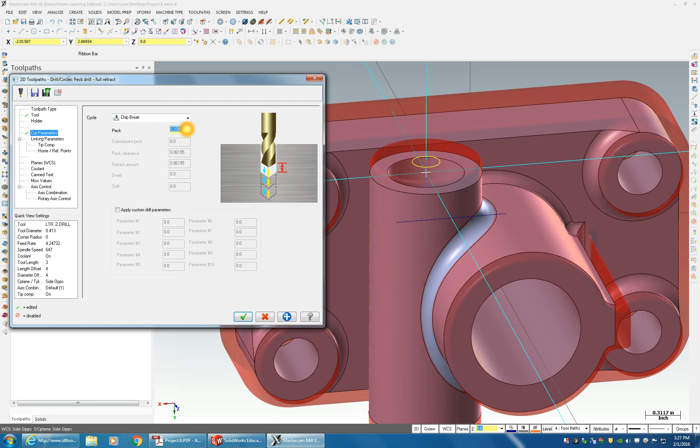0.413 divided by 2. Now let's go full depth per break. Linking parameters, top of stock is actually at 0, and depth is down to here. And we're going to need to make sure we have tip comp. I want to bust through 100 thousandths and add a tip. No, let's go 50 thousandths. Let's go 10 thousandths breakthrough.

Plane side ops, tops, coolant on. There, so now we got that going through.

.688 is 11/16 drill. We're only going to drill this guy. We're not going to say this guy needs to be bored. So yeah, well, let's just come back to the parameters of this chip right here.

Instead of this letter Z, let's find 11/16. Here, I'm going to show you something else too. Let's go to select library tool, turn the filter on, equal to 11/16 drill. Move that, and that's how you find it real quick.

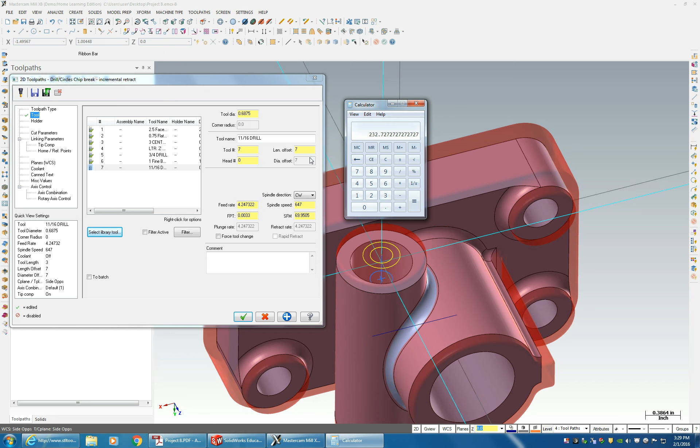Now we do have to do our feeds and speeds for that. So 4 times 80 divided by 11/16 is 465, divided by 2 is 232. Times say 0.005, feed rate of 1.16. It's about 2.5 thou chip load.

That looks good. Cut parameters. We'll go full depth. Linking parameters are all still good. Tip comp is good. We'll prove that. Regenerate, and that looks a lot better. So what else we got left to do?

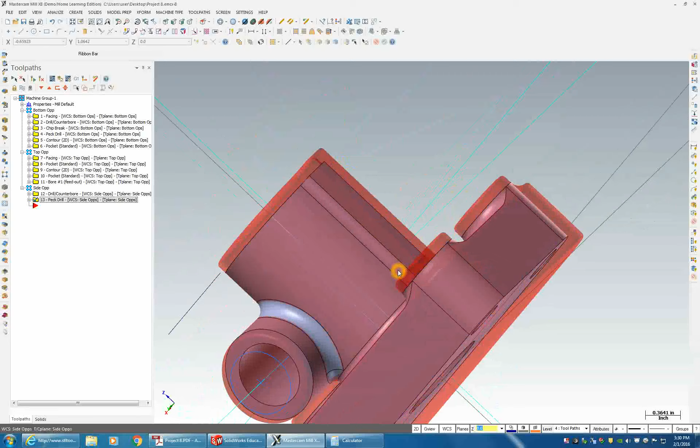We have, we'll call this side operation 2. How about that? And we're going to set the origin right here at this corner of this piece right here. So let's go machine group, and we're going to create a new group. Actually, we'll call this pad op, because it's kind of a pad. We call it, if side op 2 works best for you, that's fine.

So plane manager, solid face, this guy here. That looks more appropriate for me. So go ahead and do that. We're going to change our origin up to here. Get a unique work offset. Call this pad op.

Prove that. So we'll go WCS, name planes, pad op, planes, WCS, name planes, pad op. Now what we're going to do is mill this thing flat with a standard flat end mill, a small one.

Let's go mill tool path, and we're going to do a pocket. Make sure we do a chain select here. You know what, that's not going to work, because I wanted to hit this edge here and go beyond all these edges. I can't do that with that in one operation.

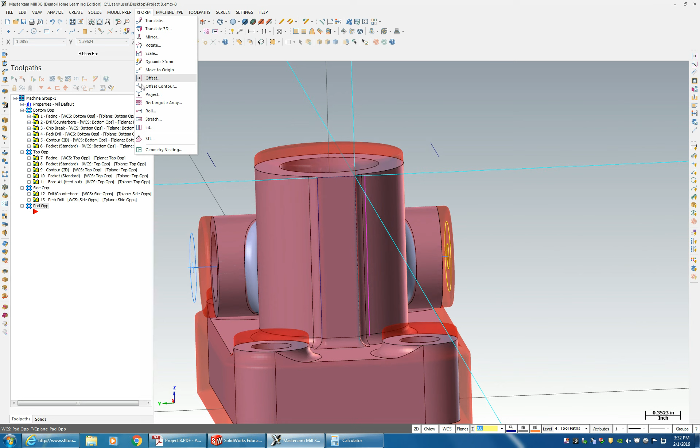We'll need to connect them and rejoin them, and then we'll go from there. So we need to come to the trim icon. We'll do an extend, this one and this one, these guys.

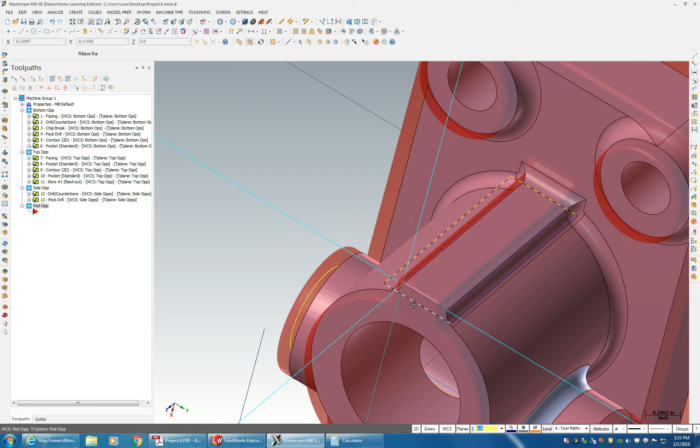I'm going to connect the ends together, so we're going to use this whole chain to drive the tool. Now with select only, I'm going to do wireframe. I'm going to just select those four guys and move them to layer four. And these three here, I want to make sure they're on level one. Yeah, they weren't.

Okay, so now let's do machine mill tool path, pocket, and do wireframe. We'll select this chain going around. Now for the tool, we've got to be careful what type we want to use. We want it to come all the way across and hit this chain, so we need something like a 200 thousandths end mill would be okay, but that's kind of an oddball tool.

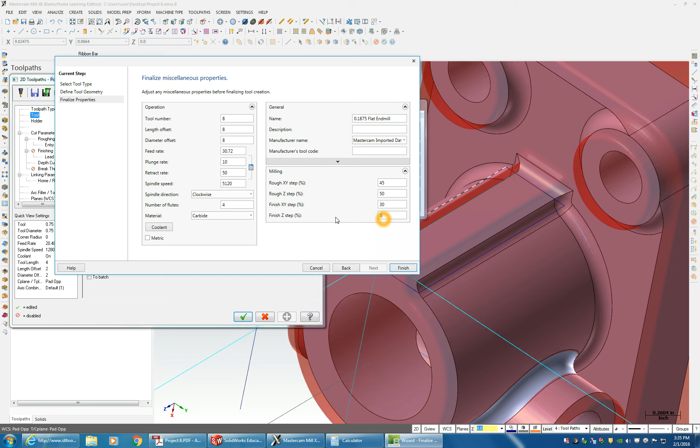Rough step 45, rough step in Z 50, 30, and 10. Actually, we can leave this at 52. Finish.

Cut parameters, we are going to be leaving no stock on the wall. Roughing, we are going to go true spiral. Next, let's go one way, or zigzag -- we'll do zigzag. Entry motion, I want a helix entry.

We don't need a finishing pass. We do need depths of cuts, so let's go 0.1875 divided by 2, about 90 thousandths depth of cut. Finish cuts, we'll leave that at 0. We'll do keep tool down.

Linking parameters, top of stock is here plus 0.125. Feed plane, that's okay, and retract above this part. And leave it in absolute, and depth is there. Make sure we got pad op top, we're good.

Okay, so now this should come through. We're going to review this and make sure it actually comes and leaves a nice crisp shoulder here, and on top of that, it doesn't collide with anything too. Okay, so it leaves a nice crisp shoulder here, and we're going to come in with a ball mill and finish that up, because the engineering team says we need that fillet.

Okay, the fillet size on this is 120 thousandths -- actually it's 90 thousandths, I believe. Let's pull it up. Yeah, it's 90 thousandths, so we have to create a custom tool for that.

So let's do mill tool path. We will do -- let's try to see what would be the best. Let's do a surface rough flow line. We'll leave it undefined. Oh, I forgot this nice little thing here, so I've got to restart.

Mill toolpath, surface rough, flow line. Now it's asking me to select drive surfaces. None of these are surfaces, so I have to activate solid selector and make sure I just have this icon here as my surface face. And that's my surface face I want. Now I'll have to hit enter twice.

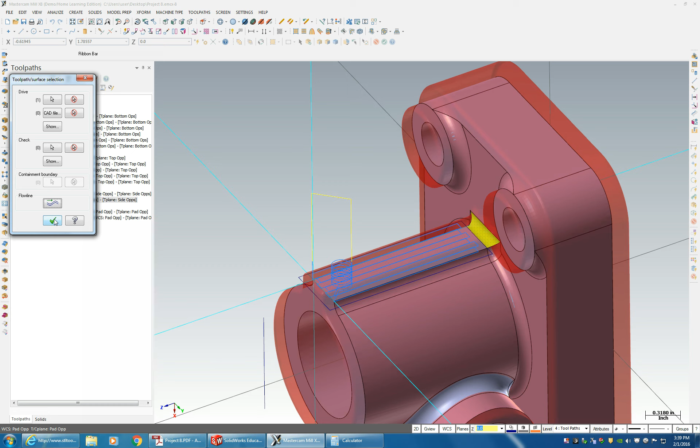Approve that. We are going to create a new tool. We're going to do a ball mill.

Cutting diameter is 0.18. Actually, let's do 0.175, or 0.125 actually. We're going to have it created all for us. Overall length needs to be 3 inches. Cutting length 0.5 is fine. It's full radius. Shank diameter is also 1/8.

Feed rate: 80 times 4 divided by 0.125 times 3, 7680 is the spindle speed, times 4 times 0.001, 30.72. Plunge rate 25, let's do plunge rate 20. Let's do plunge rate of 15, half of this, because we are technically doing some plunge rating.

Clockwise carbide 4 flute, we're going to say it doesn't like coolant. I'm going to leave these all at 0.

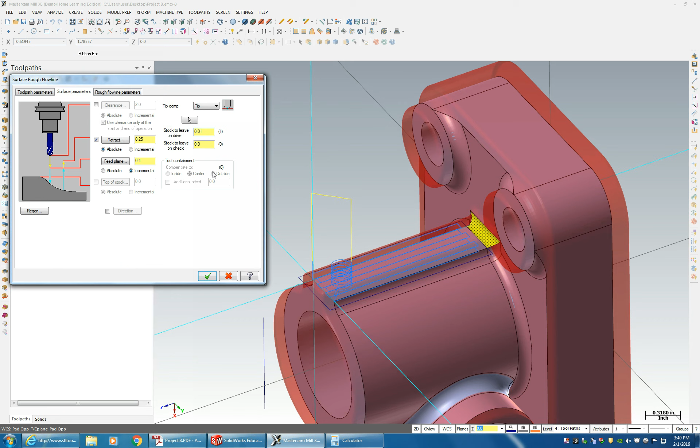Surface parameters, stock to leave on drive, and we'll take it all the way down to 0. We'll do this all in one pass, and we'll leave a scallop height of 1/1000. Actually, let's do it with half thou. Maximum step down is 0.005.

It has this little bitty toolpath for us. Let's go ahead and run that.

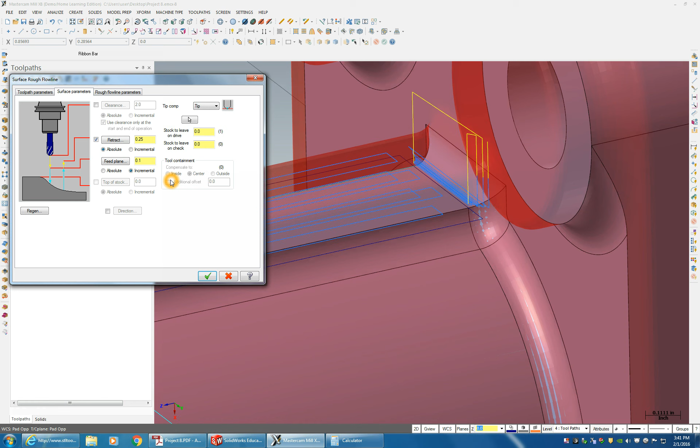I want to see what it's not doing. It's not realizing that we have material to cut out, and it's trying to cut a lot in one shot. Okay, let's go ahead. I don't want to do this. Let's go ahead and show you what's happening first.

Just taking these two and simulating it. We'll slow down the speed here. So this end mill's coming in doing this pocket, all just fine, no problem. The ball mill now comes in and it's going to try to take that all in one shot. Bam! That would absolutely break the tool.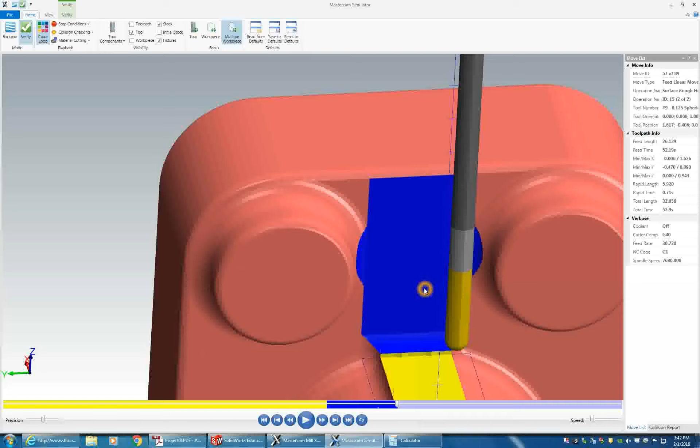Not to mention we're really getting in, and I think we're getting really close to our fillet. You know what, for the purpose of this video, we may not even worry about that. Yeah, engineering wants that, but it's really hard to get in there without a proper fixture or something. We may have to, actually, you know what, let's go ahead and keep doing this.

Shoot. Okay, well, this is supposed to be a much more difficult project anyways, and engineering is saying yes, we absolutely need that fillet. This is a high stress part, and if we go with a 90-degree cut there, we create a shear point, basically. So what we're going to need to do is create yet another offset, a fixture point, where we hold this part at 45 degrees to the spindle so we can get our ball nose down in there and make that cut.

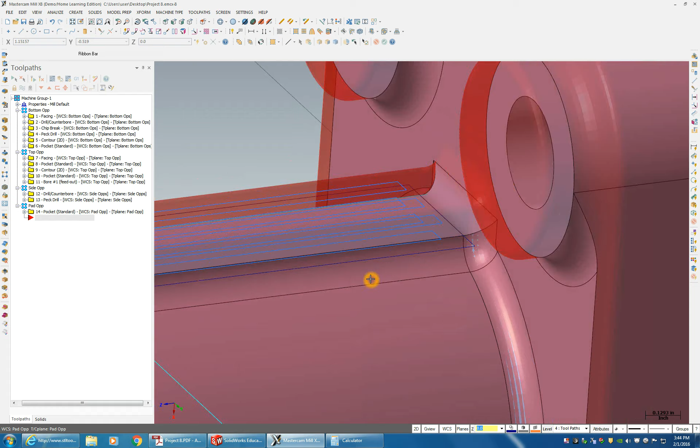So in order to do that, we're going to get rid of this guy. We don't need this. Make sure you only have one checked, and we'll delete it. Now we need to come to the front face, so I'm going to go WCS, front, and planes, front. Let's do planes top. So top WCS on the planes.

Let me draw some here real quick. I want to see where that... okay yeah, that's exactly what I want. So what we got to do, looking at this part, is we need to create a line kind of coming off of this at 45 degrees for our orientation of our origin.

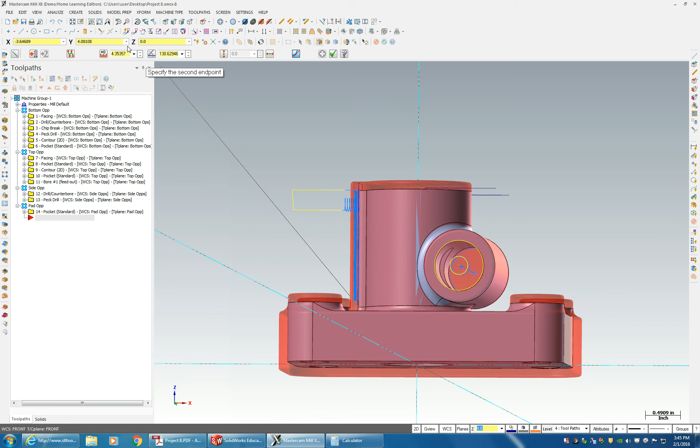So I'm going to make sure I'm in 2D snap. I'm going to snap to this corner, and I'll put an angle of 135. That means I'm drawing out at this angle here. Now I need to create another angle at 90 degrees. Oops, I didn't approve that before doing that.

So we'll snap to here, 135, out to here, enter. Create another one off of here, but this time we'll go 90 degrees. Well, 135 plus 90, so I went at 90 to that one. So 135 plus 90. There we go. Out here.

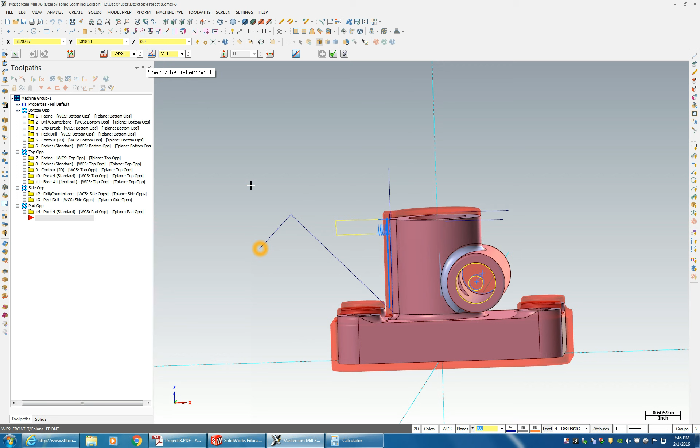And now I need one that basically comes off of here and out into space. So we're going to switch to WCS and top. What I'm basically doing is drawing my X and Y axis. This at 90 degrees. Then go to WCS top.

Okay, so now when I look at the top, I'm looking at the top. So we need a line coming off of this point here. Go back to three-dimensional snapping all the way to the bottom. I want to snap here, and I want to come out 90 degrees. And there we go. So why did I draw these lines?

Well, this line here is going to represent the z-axis, negative z-axis, pointing at this fillet. We're essentially going to be having a part stuck in the machine kind of like this, so we can come in and get access to that fillet. And like I said, engineering says we must have that fillet.

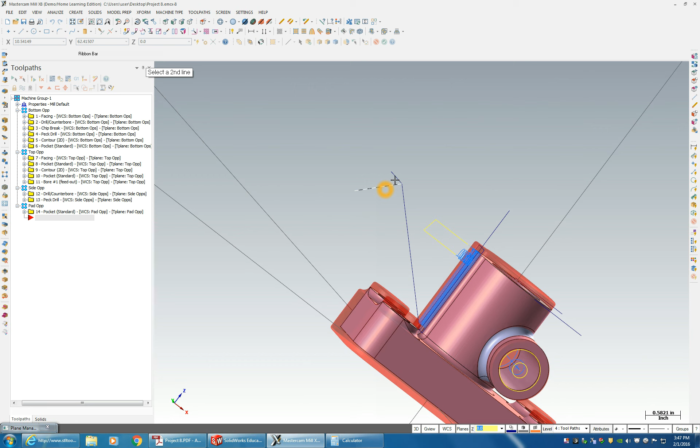Approve that. So we'll go WCS, named planes, angle opp, WCS, or planes, named planes, angle opp. See, now we got this oriented according to these CAD lines.

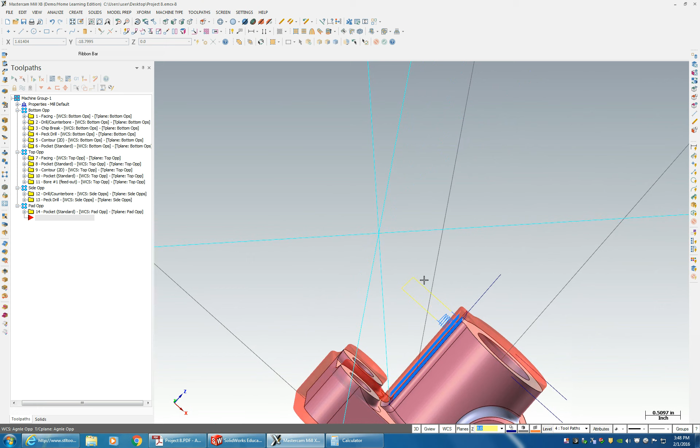Now I have these CAD lines in my tool plane. I need to move those back to level 1, so right click on level to level 1. So is this the best place for origin? Probably not, but it's going to be effective in allowing us to get in here and do this machining operation.

So we're going to create a new group. I'll call it angle opp. We're going to do surface high-speed rest roughing, start with that.

Now my plan is that it's going to take into consideration all the machining we've already done. So it's asking for select drive surfaces. These are not surfaces, they're solids, so turn on the solid select with the surface filter, and that is the surface we're looking for.

Containment boundary - we actually do want one. We are going to do a chain select, and it's going to be that face because you don't want it to go outside of that. Like I said, hopefully I get this right in the first step, but we'll see.

So we already created the tool, so we'll reuse it. The cut parameters, use climb. Toolpath type, rest roughing - what the rest means is it's actually looking at the area around it to see what material's left, and comes in to machine it out. Cut parameters, step downs - they're okay.

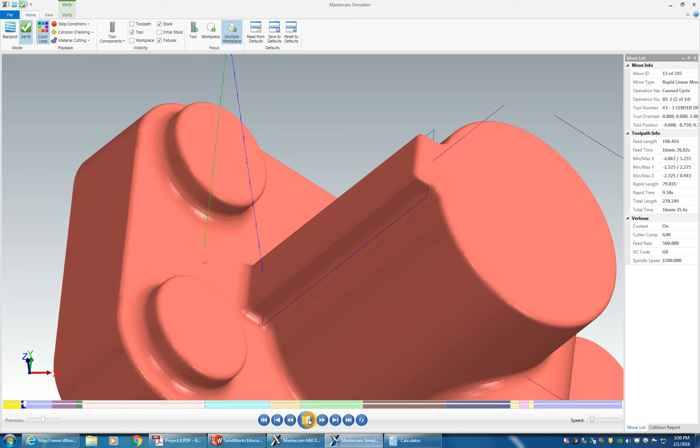Should have. There's a long operation here at the back. So I'm going to stop it right there. Bring the speed all the way down.

What the heck was that? Oh, it's just a transitional move, it wasn't actually cutting. So no, it's not actually doing anything, this is just the pocket. Okay, so it didn't cut this out.

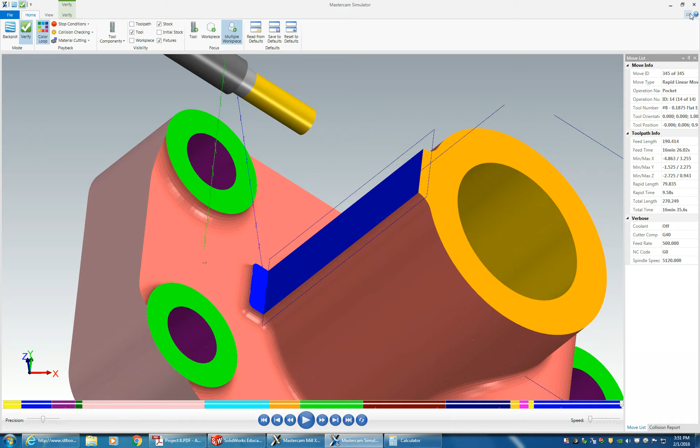See? So okay, let's go back to parameters here. I don't know, let's go to geometry. I'm going to take out the containment boundary. Doesn't like that. Let's go up here, let's go to area clearance.

Still use the same tool, cut parameters are all fine. Let's go to opti area - I think it has a climb, step over 35%, step down 10%, micro lift distance, not really concerned about that, 100, 10 thousandths to leave. Now let's go all the way to 0.

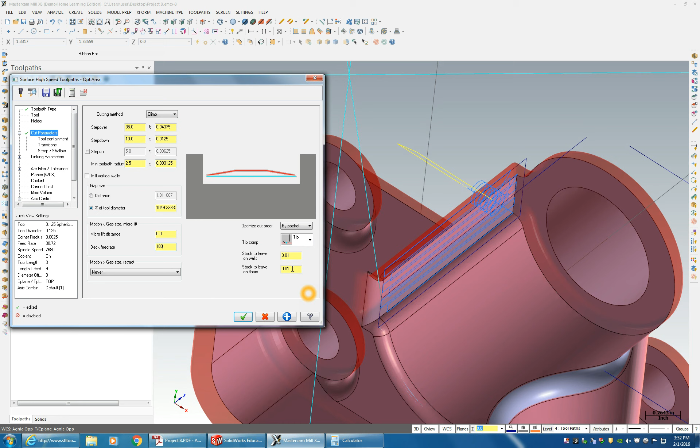Tool containment, transitions, helix only. Regenerate - it is still not doing it. I absolutely don't get it. Okay, let's delete that.

Let's do a flow line. Retract. Incremental feed plane is okay. Rough flow line.

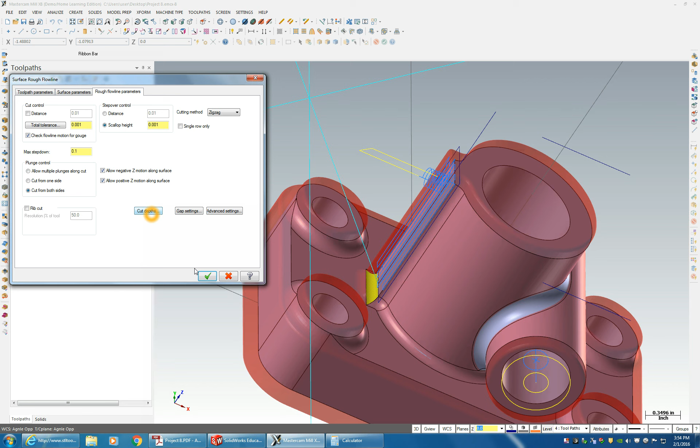Scallop height of 1/1000th of an inch. Do a cut from one side. We'll allow multiple plunges - let's do cut from both sides. Approve that. Okay, now that's looking better.

Problem is we're doing it in one depth - that's the bad thing. We may have to leave it at there for the sake of brevity.

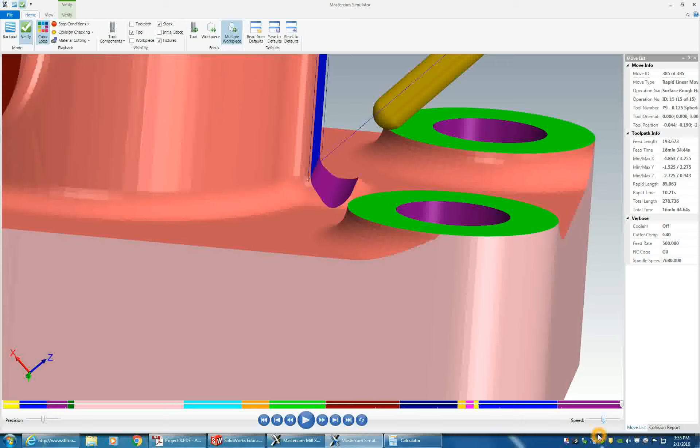That's pretty close, I'll be happy enough with that. At least got us mostly where we wanted. It's still not looking great. The reason why this is still sticking out is the casting. We could go back and tweak it a little bit more, but like I said, for the sake of brevity, we're going to go ahead and leave that fillet.

This is not ideal, but I kind of give you an idea of how to use some angled operations. So that is it for now on this program. Let's take a look around, make sure we got everything else. We got drilled through - yes, this was definitely one of the harder ones here.

I'd like to see if some of you can spend some more time and figure that one out. Okay, do you have any questions? Let me know.